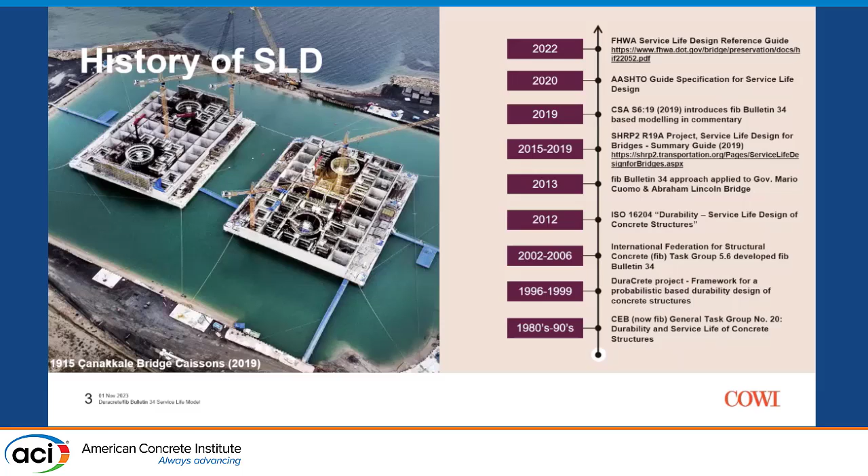So, a bit of background on how we got here. We'll take a quick look at the actual equation - this is what the model is. It's an analytical equation using Fick's second law of diffusion, and that's how it's modeling the process.

I'm not going to go through the details, but the highlights to extract from this are in red in the equation - those are basically your environmental loads. CO is the initial, background concentration of chlorides present as part of the mixing of the concrete initially. CS is your surface concentration, what's driving the chlorides in. T real is the annual temperature, which we were provided, and that's a direct input into the model.

On the opposite side, on the resistance side, those are the green parameters. You have DRCM0, which is what's called the chloride migration coefficient.

We saw in Neil's presentation one of the input parameters we were given was NT-Build 492 testing - that's actually pretty much the only input we used from what Neil provided. That's a test done at 28 days typically, usually takes 1 day to complete, and can be done as part of pre-qualification or even production testing.

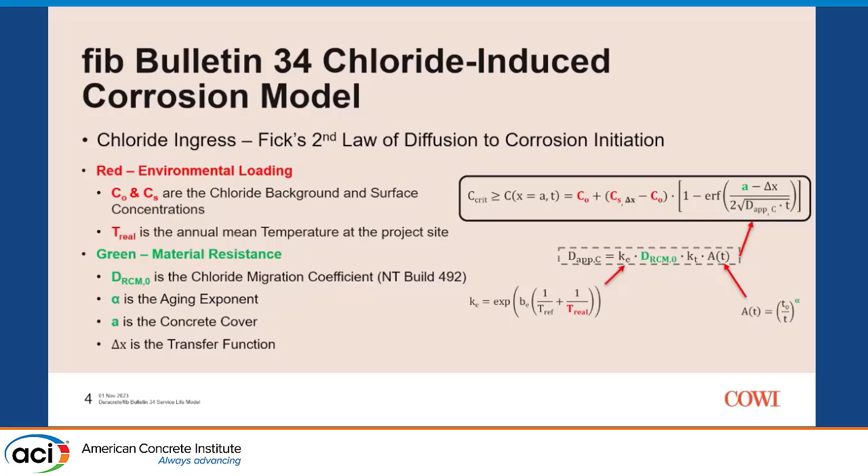We have an aging exponent that was discussed a little bit before, and we'll talk more about that. And then, of course, you have your concrete cover, which is your most significant protection against corrosion initiation.

Not going to go through this in detail - it's just to express the complexity of the input parameters. These describe all of the parameters I just talked about, with some short descriptions there. Fib Bulletin 34 gives recommendations on how to use those and what the values should be.

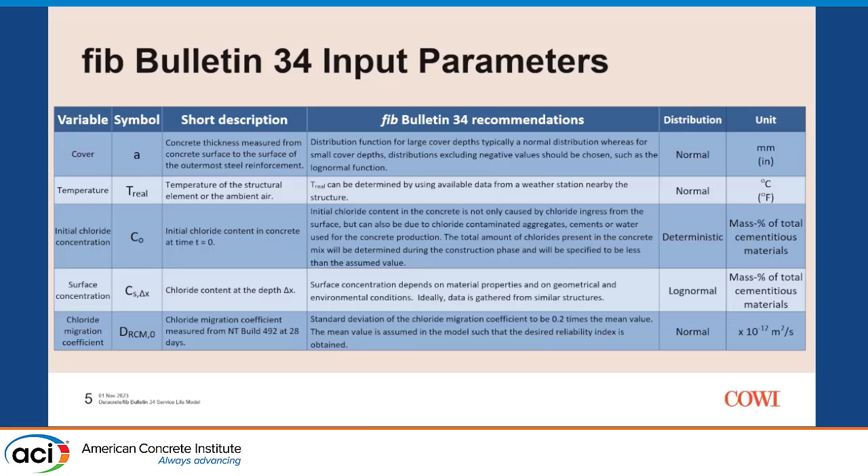All of these input parameters are treated as distributions - you see there, it's a normal distribution, deterministic value, log normal distribution, and that's how we're baking in the probabilistic side. All of our input parameters are distribution curves, and we'll see some of those later.

Following up, there's a few more input parameters, not going to go through that in detail. This is basically extracted from the fib Bulletin 34, and actually I believe this table came from the SHRP2 R19A summary guide, which is available online for free.

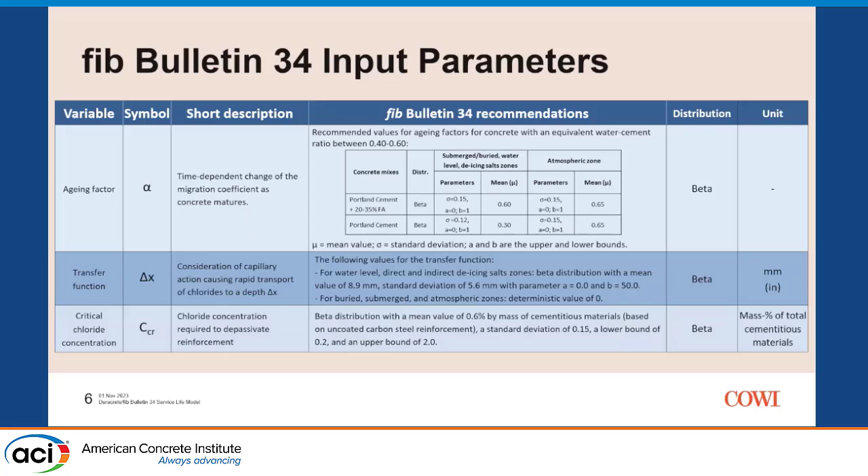Essentially, this is kind of what we're modeling. All of the influential input parameters are probabilistic distributions, and this cartoon illustrates the process. Up on top in green, let's take a step back - the vertical axis is your depth into the concrete, and along the x-axis you've got time. Your resistance is indicated by the green, which is essentially the depth of cover, and again there's a distribution of what that depth is.

The blue is showing different curves of the depth of penetration over time of chlorides, showing the critical content of chloride - how deep you've reached with a critical content of chloride that can initiate corrosion. And then what we're controlling is the overlap of those two curves, right?

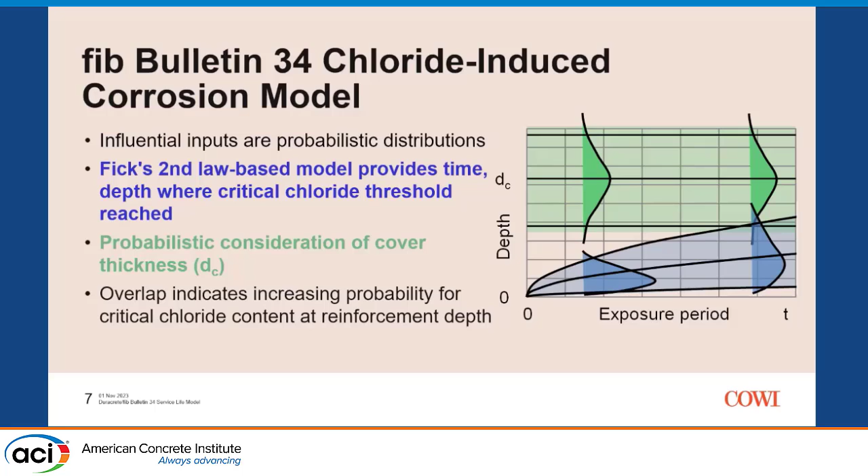So that 10% that we talked about before, that's a sort of a 10% overlap, and then we stop.

We talked earlier about limit states. We have options for limit states, technically, for deterioration modeling. There's an initiation phase where chlorides penetrate into your concrete. You reach a critical value of chlorides, and then corrosion can take off. Subsequent to that, corrosion products develop tensile strains inside the concrete, and you start to see cracks, spalls, delamination spalls, and eventually collapse—which hopefully happens years later. Typically, that's the case. But the assumption here is that depassivation, just starting corrosion, is our end of service life. So it's very much a serviceability limit state, not an ultimate condition.

As was discussed before, we have a 90% probability that corrosion will not initiate, or a 10% probability that it will. We'll talk a little more about reliability index, but this value beta, that 10% probability, is roughly a 1.3 reliability index. So that's actually an input parameter into our model.

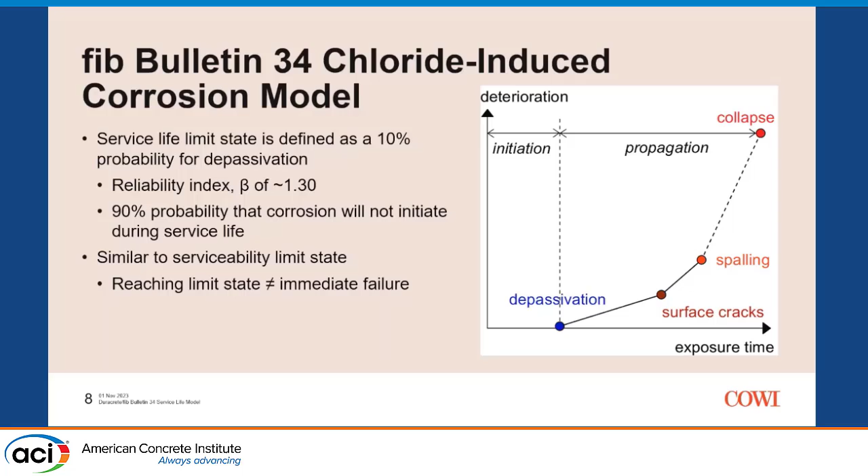So we had to take a look at what we were asked to actually model. There were three basic cases: the bridge deck, marine piles, and marine walls. Something we always have to do, as discussed previously, is acknowledge the limitations and fundamental assumptions of our model.

The fib Bulletin 34 model was developed considering concrete cast into formwork. So it's not developed or appropriate for modeling concrete cast immediately against soil. The assumption was that these marine piles were cast against soil, and essentially we wouldn't be able to apply the model in that case. Our actual design approach would be to rely on deemed-to-satisfy provisions, because the model is just not built for that.

So essentially, we don't look at case 2—that's the last time we'll talk about case 2. For case 3, it's assumed that the marine wall is cast into formwork and then backfilled against, not cast directly against soil.

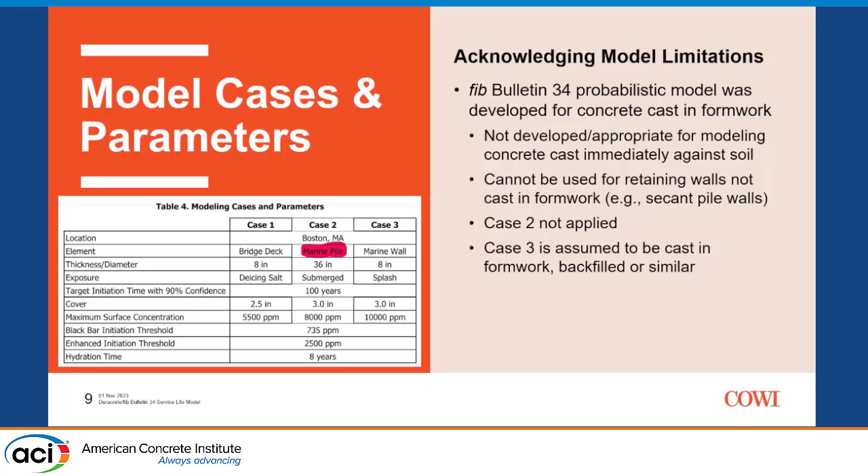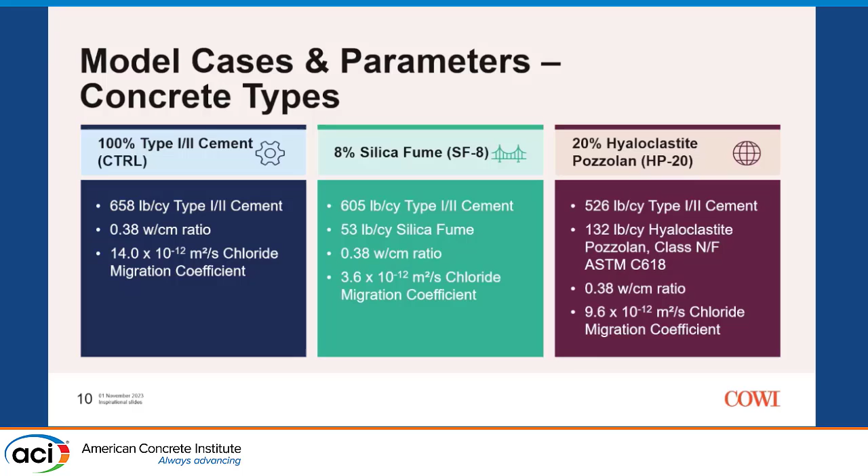So what did we actually do? Like I mentioned, we have this fib Bulletin probabilistic modeling. The brief here was to really look at these workshop input parameters—and I've put an asterisk there. We performed the modeling as requested, but acknowledging that certain inputs are not standard to fib Bulletin 34. So we wanted to see, well, what impact does that have?

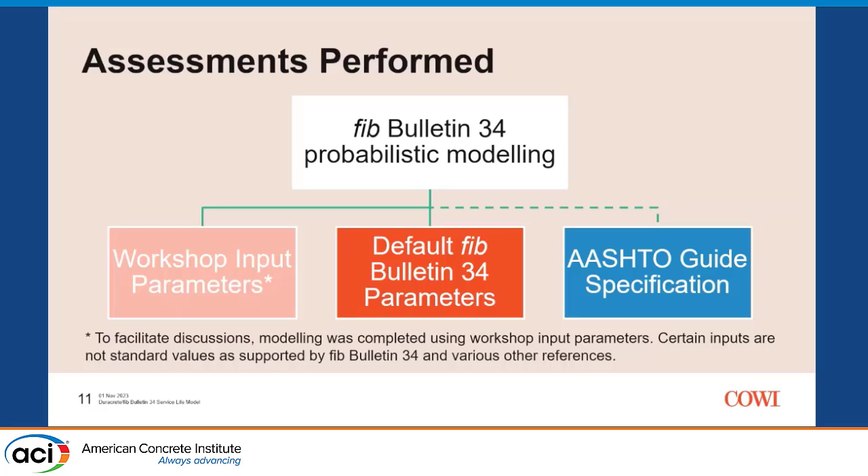This was already just asked earlier. So we looked at the default values too—we've done a parallel study. And then you see the dashed line, we bring in AASHTO Guide Spec as well, which hidden inside of it has a lot of fib Bulletin based modeling. So this is what it looks like then.

We've boiled it down to 2 cases: our bridge deck with 2.5-inch cover, our marine wall with 3-inch cover, 3 different mix designs, and some key differences here. The workshop defined inputs stop hydration at 8 years. We're taking the age factor from test data, which is not per the fib Bulletin approach—we'll talk about that a little later, but fib Bulletin gives a method to determine age factors. That's not this, but for the sake of this presentation, we've done as asked. And then we've used the C-crit, the critical chloride values provided.

So we've got the black bar and this enhanced bar. We've needed to convert that to percent mass of cement. So that's our conversion, assuming a density, and we're given the concentration or the cement content in the mix design. So we've used that to get these values.

In fib 34, the age factor, as discussed before, is for the duration of the 100-year service life. And then for the C-crit values, we used the default values, which are actually the same in the enhanced case, but for the black bar it's slightly higher.

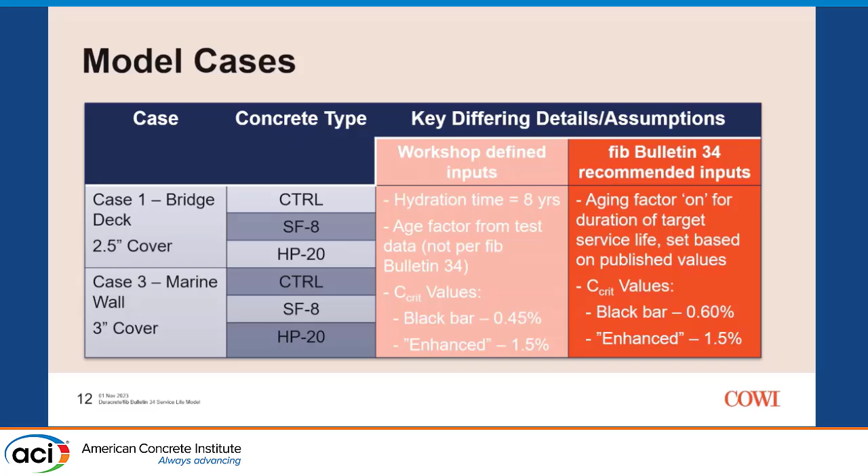Again, we needed to interpret the input parameters to be able to run our model. In particular, we were provided a maximum surface concentration, but our model needs a mean. We didn't want to set the mean to that maximum because then you're really skewing the exposure, overemphasizing the load.

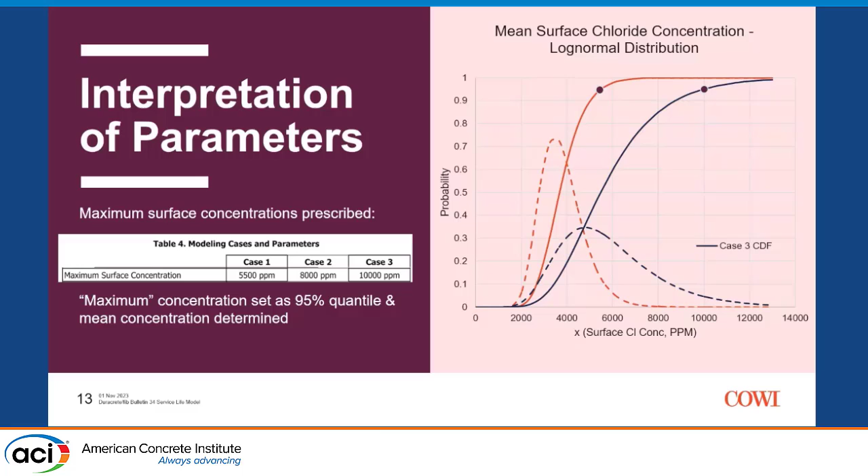So we made an assumption there. Here we have probabilities plotted, treating the surface concentration as a log normal distribution. The curves that go up to 1 are the cumulative distributions, and we said this maximum value would be set to a 95% point on that curve. Then we back-calculated the mean in ppm, and did a conversion to get the mean surface concentration applied in our model.

These are percentage by mass of cementitious materials, so there's our mean value and standard deviation. A bit of analysis was needed to get a working input parameter there. Here you have the conversion assumptions: we were given the mix design, so we know 658 is right, and then pretty standard assumptions for the unit weight of the concrete to do that conversion. This is one example of a distribution, and it's how the majority of the input parameters look in the modeling we're doing.

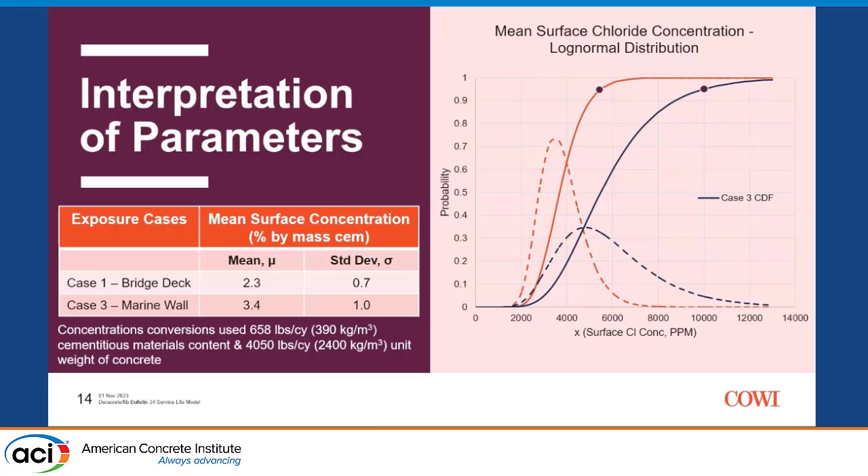We were provided resistivity, or bulk conductivity, testing at 28, 56, and 90 days. We used that, plotted it, and extracted our age factors for the first case calculations using the workshop input parameters. That's just to show the numbers.

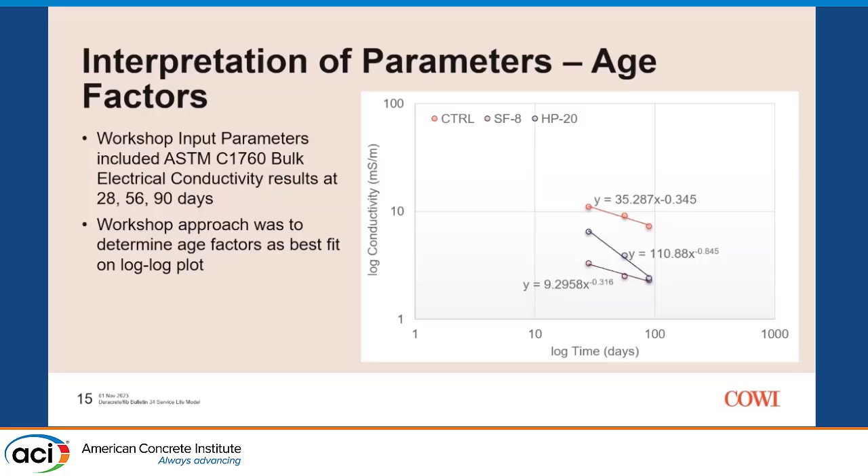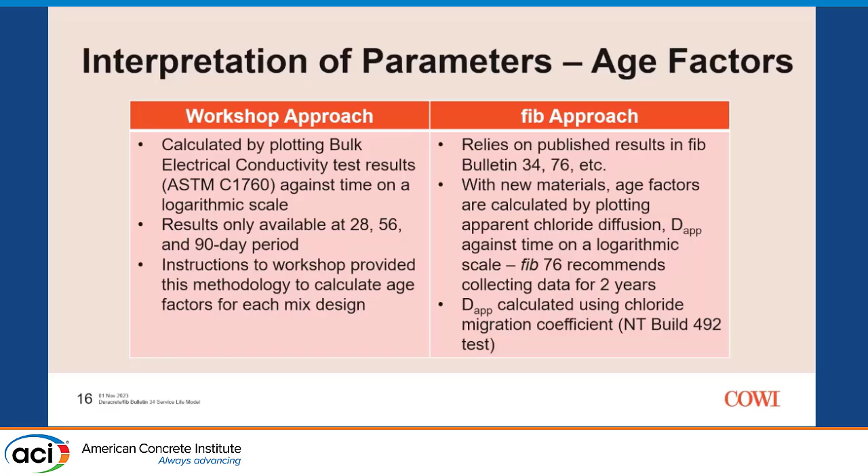As mentioned, we've done that for the sake of the conversation here, but it's not the right way according to fib Bulletin 34. That's how the workshop approach got the age factor. In the fib approach, you would either rely on published results for your age factor, or there are processes to determine it, but the recommended methodologies take quite a bit more time than 90 days to extract. So typically in practice, we'd be relying on published results.

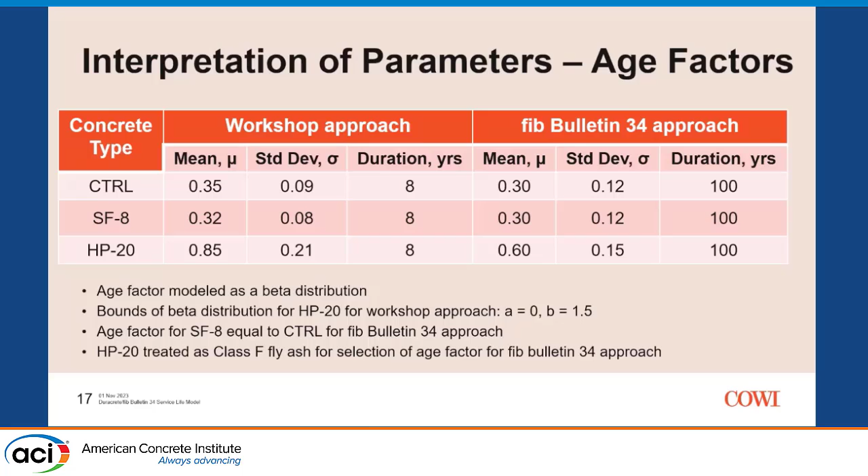This summarizes the age factors applied. For the workshop approach, we have our values from the figure a couple of slides ago, and for fib Bulletin 34, we've used published results. You'll notice the cement and silica fume mix, control and SF8, use the same age factor, which is our typical approach when dealing with silica fume. For the HP20, we assumed an age factor for Class F fly ash would be appropriate, considering it complies with the same requirements in the ASTM standard, and actually even better. That was our simplification here.

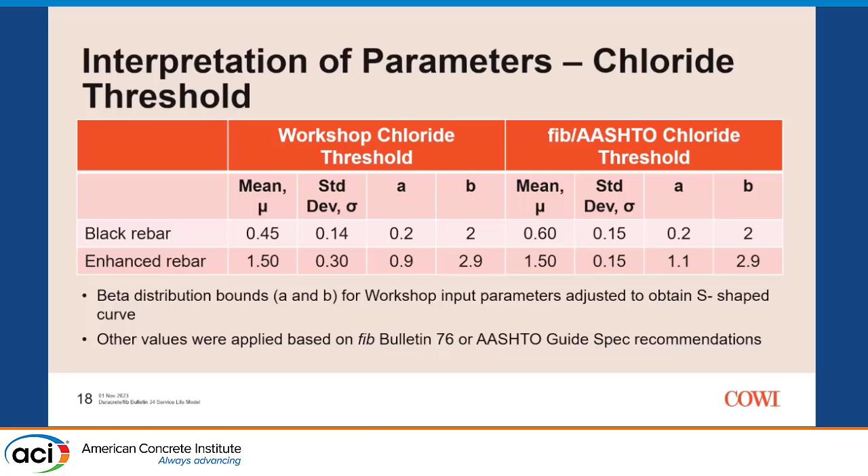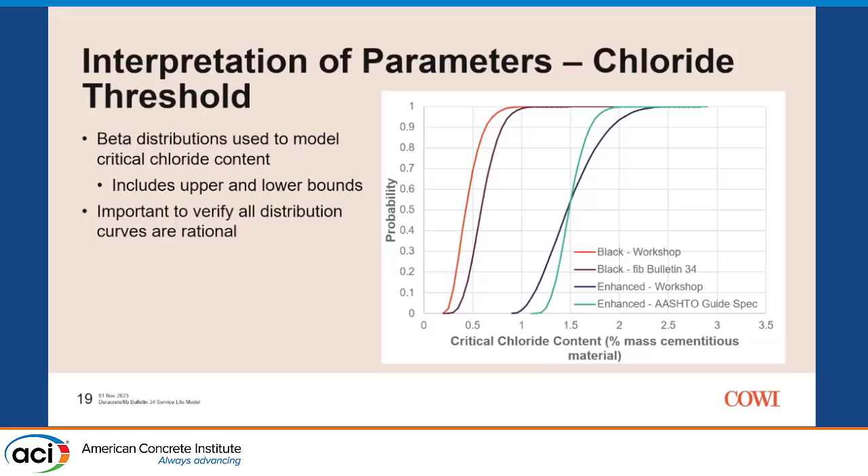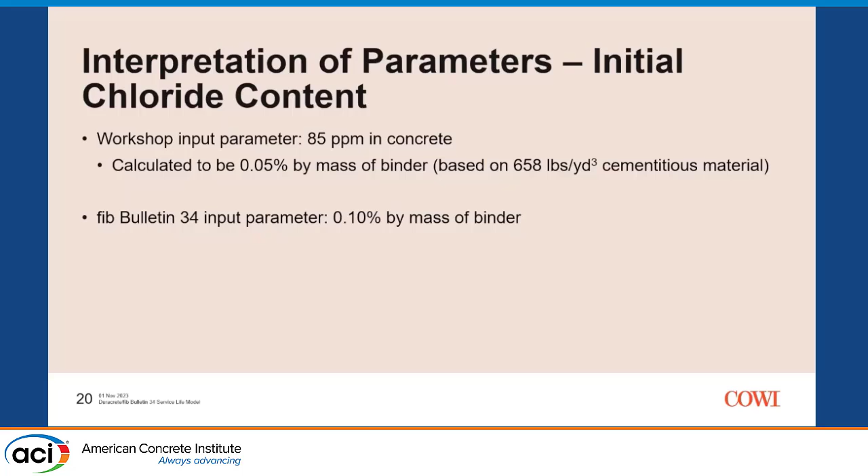And the last input parameter is just the background concentration of chlorides. With the first case modeling, the workshop inputs, we use the value provided, which is actually quite low. In fib Bulletin 34, it recommends a value of 0.1. So in our comparison, we have the lower value for the first set of calcs and a little bit higher value for the second set.

And then let's do a quick comparison of the fib inputs. Again, keep staying with the control. We have time of beta, same, still 5 to 10 years. The reliability index did get a little bit better, but it still doesn't work.

One thing I forgot to mention back when I was showing the surface concentration, that's applied from day one in the fib. It's a simplified, conservative assumption. There's no buildup of chlorides on the surface. So something else to consider, and probably part of the reason why the Life 365 modeling gave a bit bigger results, but at this point I would say it confirms the Life 365 modeling we saw earlier.

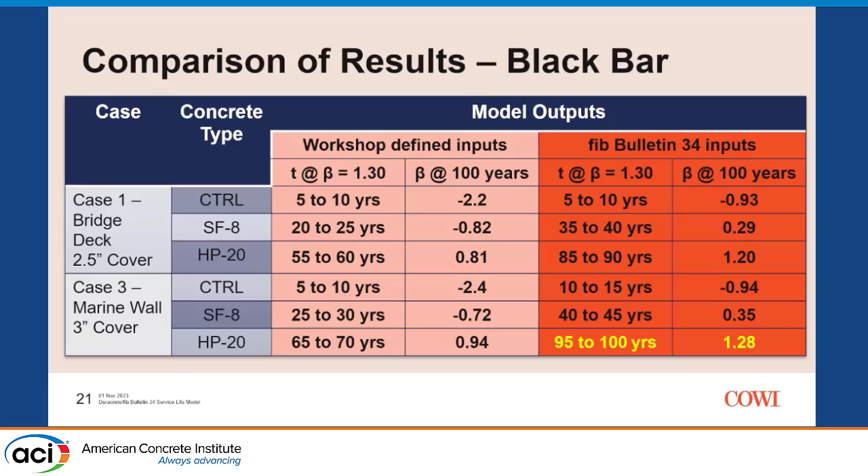Something to point out here: if we look at the 3-inch cover thickness, with the workshop-defined input parameters, it doesn't work. With the fib 34 parameters, it still doesn't work, but it gets pretty close. So obviously, when you're changing your input parameters, it changes the conclusions. We're going to take a step back in the conclusion slide and look at, does it work, yes or no. You'll see that it's quite uniform, actually, even with these differences in input parameters.

Then we looked at the enhanced bar. The situation gets slightly better there. Same exact figure, just results for the enhanced bar. We've increased our critical threshold value, so we need more chlorides to the depth of the reinforcement to cause a problem. Control still doesn't work in any case. The silica fume and the hyaloclastite pozzolan does work for both the 2.5-inch and 3-inch cover thickness. Here you do see an example where the workshop-defined inputs are very close to working with the silica fume mix, and then do work with the fib input parameters.

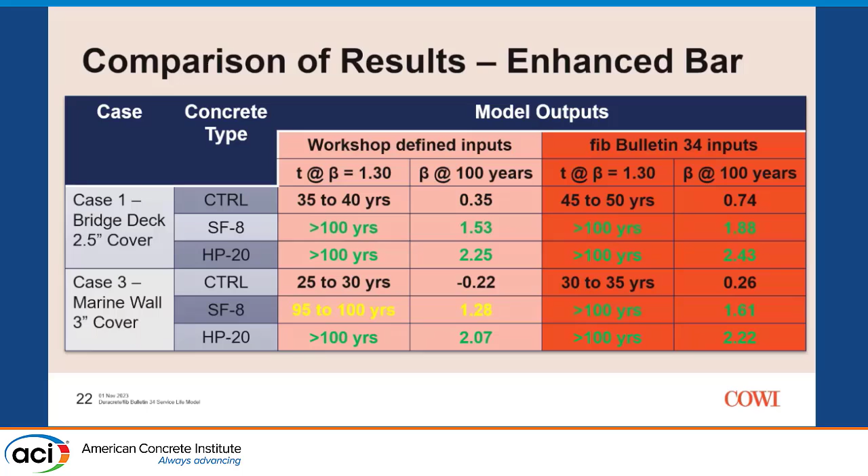It covers different reinforcement types. Reinforcement class A is black bar, B is something better than black bar, C is something even better, and D is stainless. So it doesn't exactly define what B and C are, but it gives you some variation. B is the same 1.5% critical value that we see here, so B would be the enhanced.

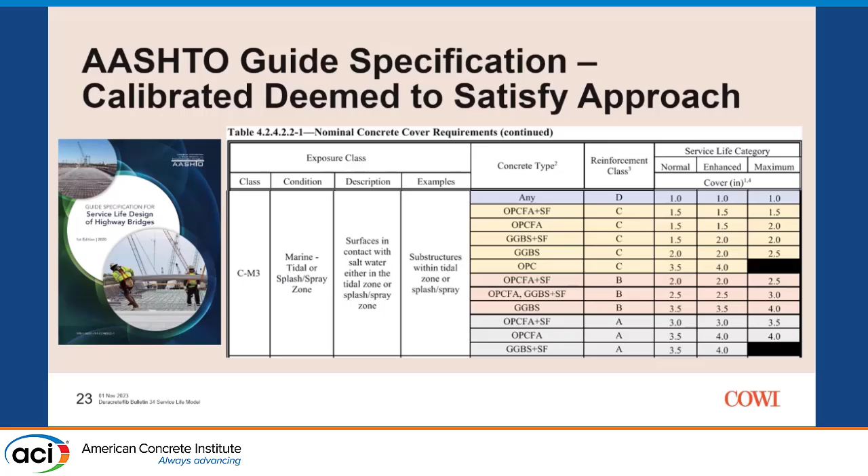What else? In this example we're showing one exposure class. So you see the CM3, which is the marine tidal. This is what we looked at for the marine wall to extract information.

So what does the AASHTO Guide Spec tell us? Essentially similar, NA is not allowed, right? So black bar, control mix, not allowed in any case. Same with the silica fume, it's not allowed for any cases.

What we could see for the fly ash mix, the hyaloclastite pozzolan mix, it works, but you need to increase the cover a bit for both the marine wall and the cover with the black bar. And then it works, and actually you could reduce the cover a little bit when using the enhanced bar.

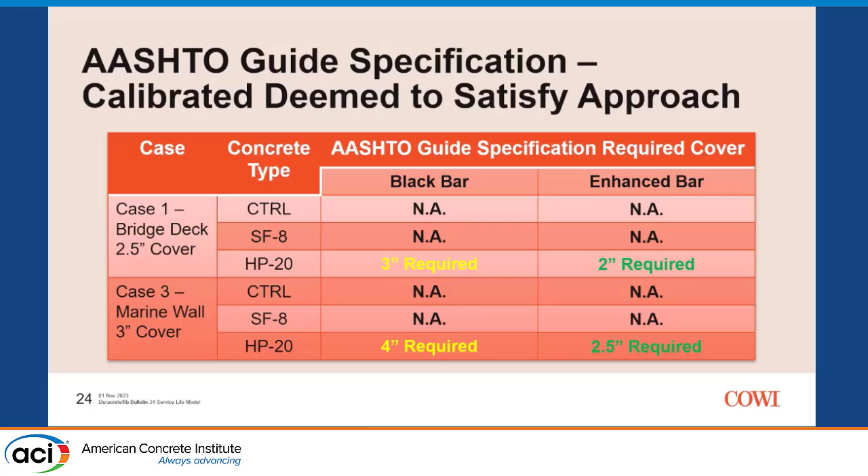So with the workshop and the fib Bulletin 34 parameters, we're happy, we're smiling with the silica fume in the bridge deck. In the AASHTO, it doesn't work. And the reason for that is AASHTO covered 5 different mix design assumptions: 100% Portland cement, a fly ash option, a slag option, and then fly ash and slag with silica fume. But it doesn't cover a silica fume mix by itself.

So I had to sort of back down to assuming it's cement, actually. It's indicative of the benefit of going deeper, right? So you've got a guide that is probably a bit more conservative, and it has an envelope, bounded by some assumptions that somebody made when they developed the standard. If you want to go and do a more refined analysis, then maybe you can improve and optimize a bit and allow a mixed design that wasn't allowed by the generic default background information.

Again, with the pozzolan, if we increase cover a bit, AASHTO says it works. We didn't do those calcs to increase the cover because we just wanted to find out how much cover do we need according to the calculations. But AASHTO gives an indication if you just increase cover slightly, then you have a working situation. And yeah, here it speaks for itself.

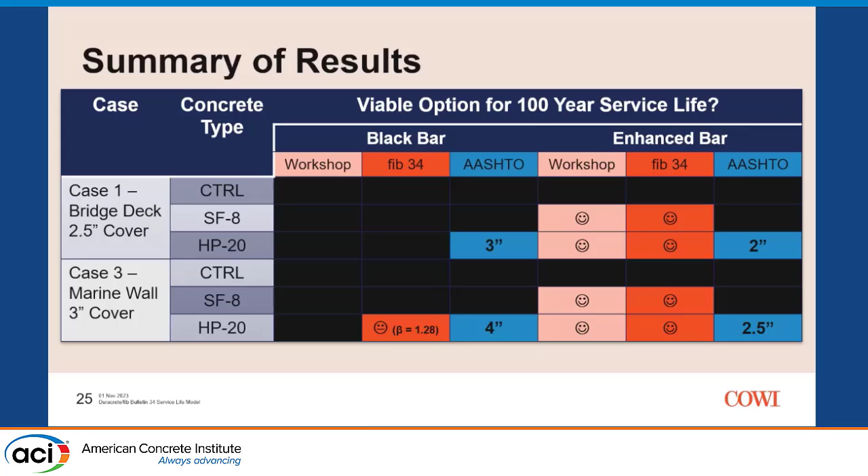With the HP, I put a little kind of not quite so happy face because in theory that doesn't work, but we could probably do some minor modifications and get it working with the fib Bulletin input parameters. And I think that's basically it.

So just to summarize and conclude, care is definitely needed, and you need to know your limitations of the available modeling. We talked about that with Life 365 as well. So you need to know the limitations, fundamental assumptions of the modeling tools used, and stick to that.

Modify your default input parameters with caution. You really need to look at the distributions, make sure that they look reasonable, rational, not having tails cut off and so on. And I would recommend having expert involvement once you're going beyond.

There are off-the-shelf tools available, like the AASHTO Guide Spec, where, if you're a structural engineer, you just can go into that and connect the dots and job done. If you want to get into the more extravagant methodologies, you probably need to involve the right experts.

And to conclude, we really found similar conclusions using the workshop input parameters and the fib ones in terms of does it work or not. We saw the specific numbers change a bit, but can we apply it? Yes, no. Very similar conclusions.

Maintaining aging of the chloride migration coefficient for the duration of the service life, of course, resulted in slight increases in the time when beta reaches 1.3 and the beta value seen at 100 years. And of course, use of rebar with enhanced corrosion resistance was effective and can permit use of concrete mix designs that wouldn't otherwise be allowed, according to the durability considerations.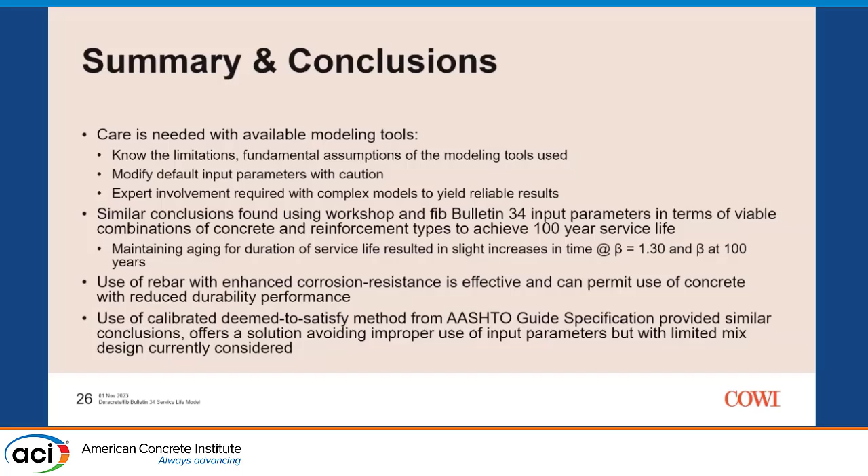Use of calibrated deemed-to-satisfy method from AASHTO provides similar conclusions, but has some limitations and offers a solution avoiding improper use of input parameters, but with limited mix designs currently being considered. So I think, if there's time.